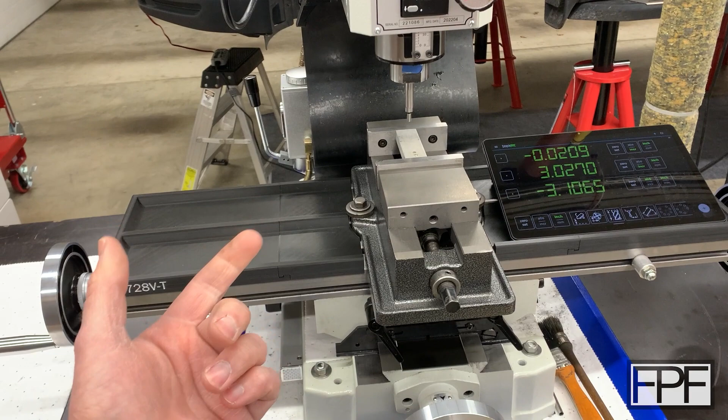So we're over here at the milling machine today, and for those of you that are subscribers to the channel, you might remember when we made these covers for the table on the milling machine. There's two pieces on each side. They interlock together and they cover our precision ground table so that we don't damage it in case we drop something, and also just keeps the chips from getting all over it. It's a lot easier to vacuum this out, and it's got kind of like a tool tray set up on it as well. So if you haven't seen that and you're interested, you can check it out in my videos.

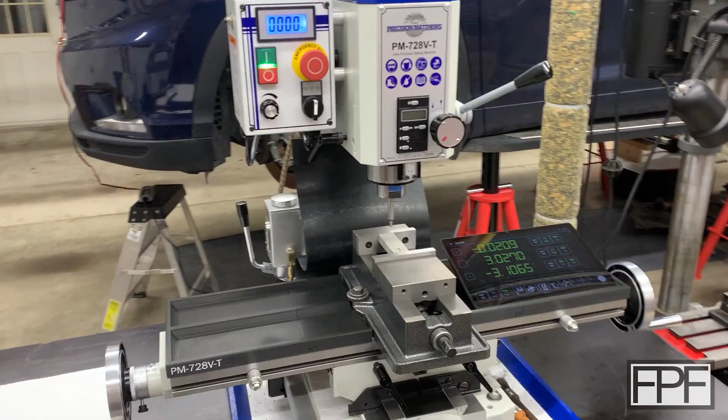But today what I want to talk about is installing a DRO on this mill. Now, they do sell this mill with a DRO. When I bought it, I had the option to buy it. I chose not to buy it initially because I kind of just wanted to get used to the machine first and get a feel for everything. And I thought, maybe I don't need it, right?

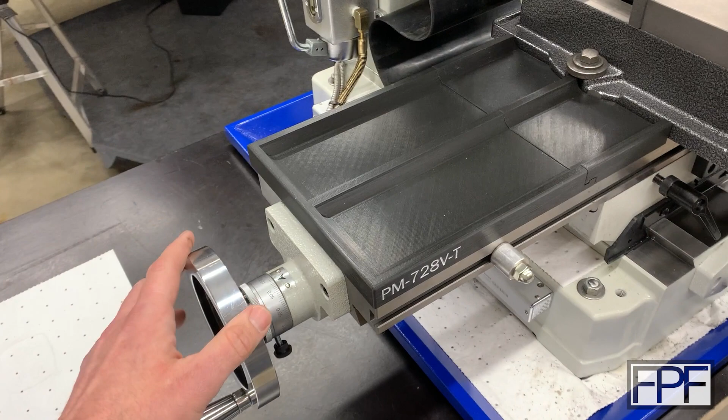I've run a lathe without a DRO. I never had any issues, but on a milling machine, it really is kind of a pain because your backlash is really difficult to work around in 3 dimensions. So what I mean by backlash is I can turn this handle a good bit in each direction before the table moves. A milling machine has 3 different axes, just the same as a 3D printer. You have your Z-axis up and down, you have your X-axis left and right here in the frame, and you have your Y-axis, which moves in and out, and that's all in relationship to the spindle.

The Z-axis, you're actually moving the spindle itself rather than moving the table on a bench mill like this. On a knee mill, the spindle stays stationary and the whole table actually goes up and down. And I can move this with these hand wheels on either side. But you see this distance here, and I know you can't feel that, but I'm moving the handle this distance and it's not actually moving the table. So that makes it a real pain to get up on a specific measurement, because if you overshoot by even a little bit, you got to come back, take the backlash out of it again, and then come back and try and hit your measurement and lock your table before you mill or drill.

So I realized I wanted to do a DRO on this. Now, they also sell the DRO kit for this mill separately. I can buy the whole kit, the scales that read the position of each of the axes, and the DRO head that gives you the numerical readout for this. I opted not to do that as well, mainly because I wanted to check out this TouchDRO system.

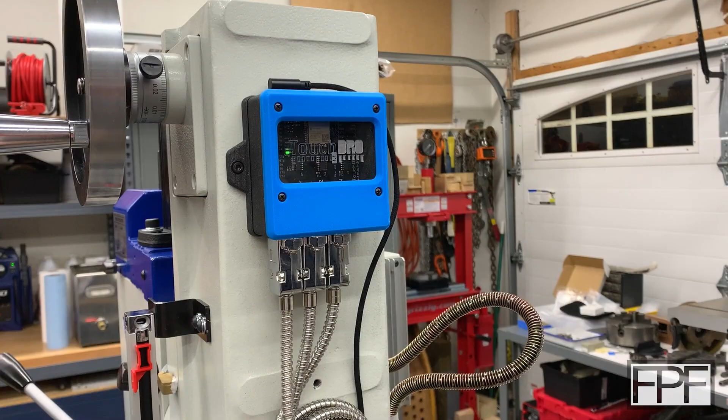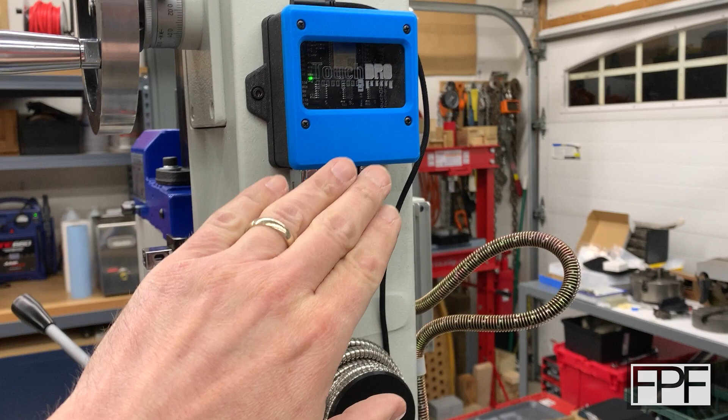All right, what is TouchDRO? So I'm going to try not to go on too many tangents in this video, but it's tough because we're talking about a lot of different things. So normally your scales, this is the X, Y, and Z cables from the scales on this mill, would plug into like a big head that has a graphical display on it that shows you your position of your X, Y, and Z axis. This has no display.

Instead, it's just a circuit board in there that is reading the value from the scales and then sending that out via Bluetooth. It actually does some intelligent processing in here and remembers the position of the scale. But then it sends out that information to Bluetooth, and an Android tablet connects via Bluetooth. It has to be an Android tablet. You can't use iOS. But thankfully, Android tablets are really cheap. This is a brand new Lenovo M10 something or other, and it was like $160. No comparison to what it cost to pick up an iPad.

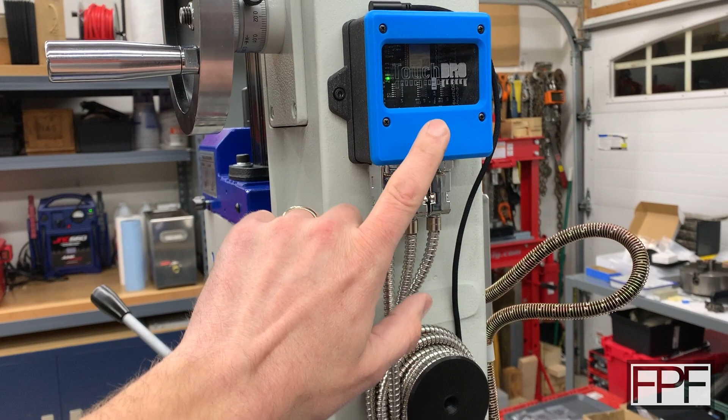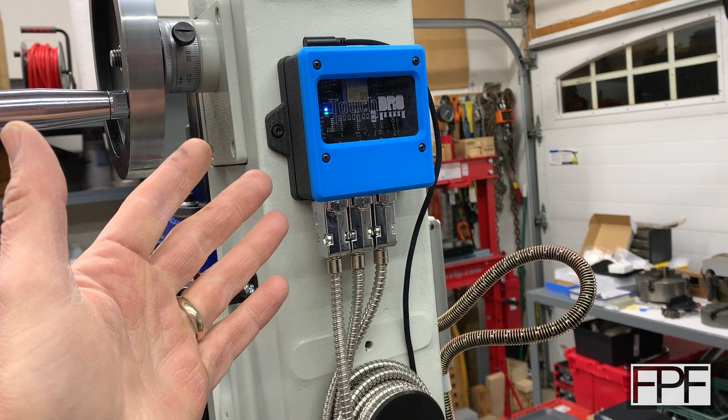So anyway, I wanted to do this because a normal DRO head has firmware or software that runs in it, and that's pretty much it. Whatever it does out of the box, that's it. So kind of imagine getting into 3D printing, buying a 3D printer, and only being able to do the things with it that were available at the time you bought it, right?

If other general features were added to slicers or whatever else, you couldn't take advantage of it on your printer. That would totally suck. And that is why I went this route on the mill for DRO, because not only can the software be upgraded on this guy, but it's just an app running on a tablet.

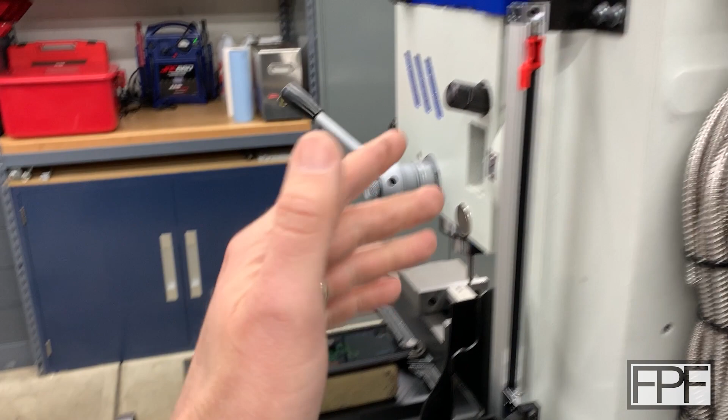The app gets updated all the time. They're always adding new features, cool stuff. No affiliation with these guys, but really, really happy with the experience.

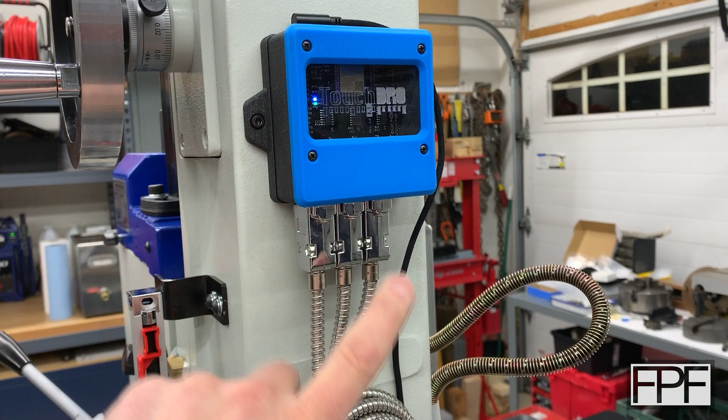This was purchased from a site called Yuriy's Toys, and I had to assemble it. The circuit board itself was pre-built. I didn't have to do any soldering, but I did have to assemble the case and assemble the pin headers for the DRO connectors, just because there is some variation in how those things ship.

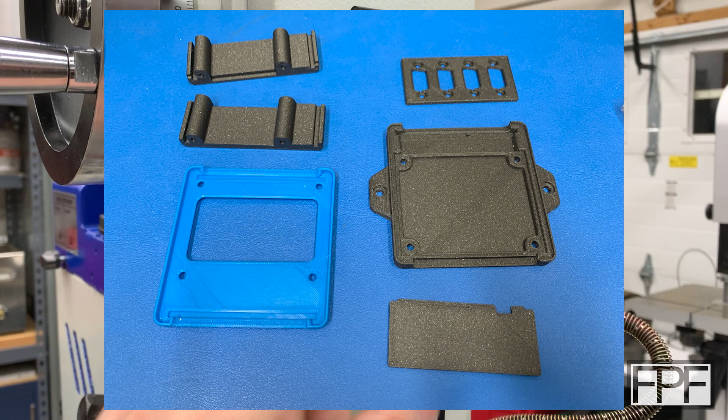Also want to point out, this case is 3D printed. I didn't print this, it came with the kit, and really, really impressive quality. It looks like he's using Galaxy Black. I don't know if he's using this stuff from Prusa or if it's a third party. It doesn't matter, it looks wonderful.

It's not printed at a 0.1 millimeter layer height, but the quality still looks really, really good. I think it's printed at 0.2. Really, really nice, clean prints.

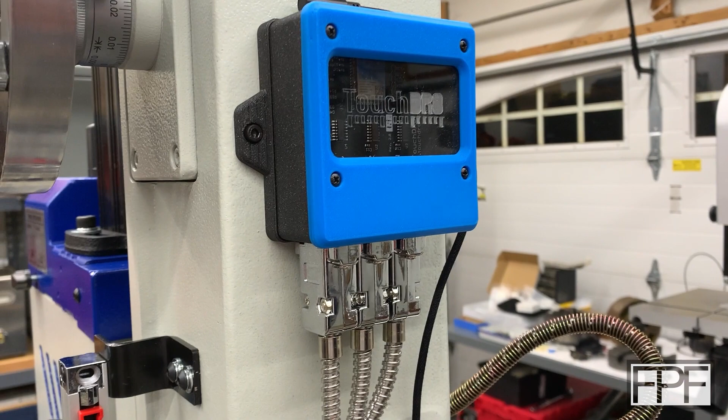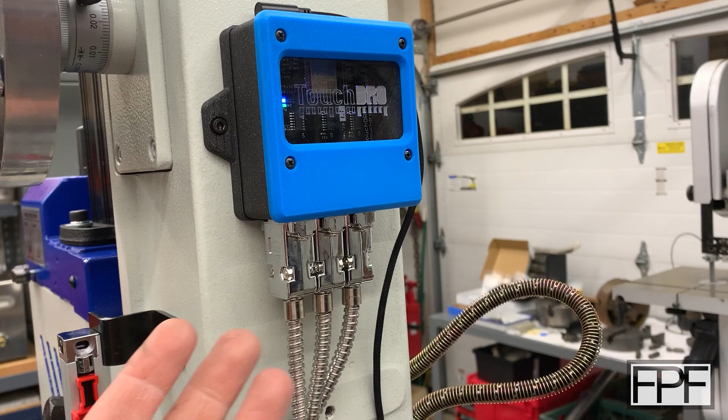So often I see 3D print kits ship out, and the quality of them is just abysmal. For anyone that gets them, I can see why they'd never get into 3D printing, because stuff is falling apart, it's cracking apart, the layers aren't all bonded. The quality of the 3D prints you get in this kit is exceptional. So great job, Yuriy's Toys.

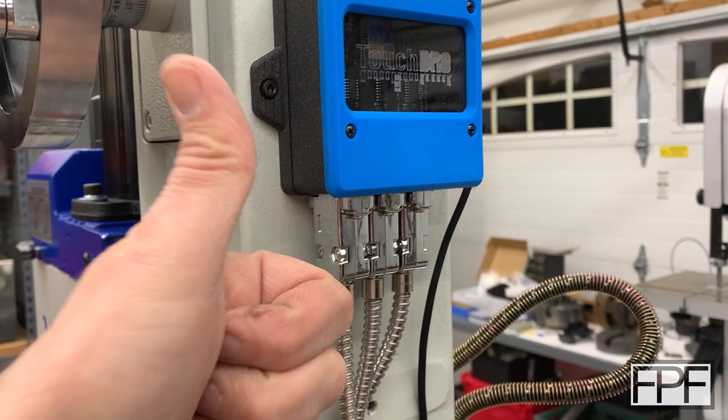And here's the interface for this. So we have the readout of our X, our Y, and our Z axis. And there's all sorts of other cool stuff we can do on here. For those that are not familiar with milling and why you'd want a DRO for this, I'll give you a quick demo.

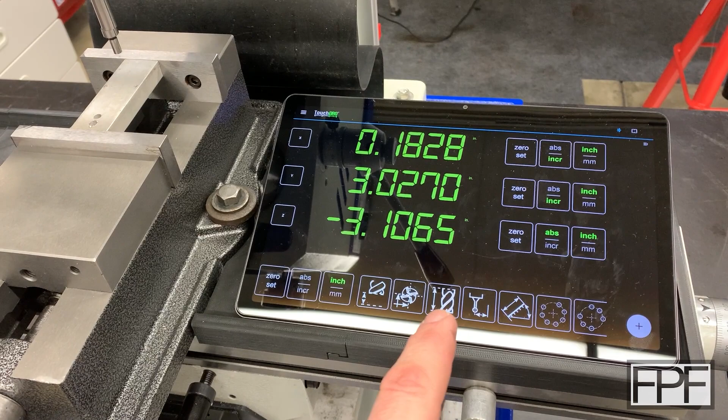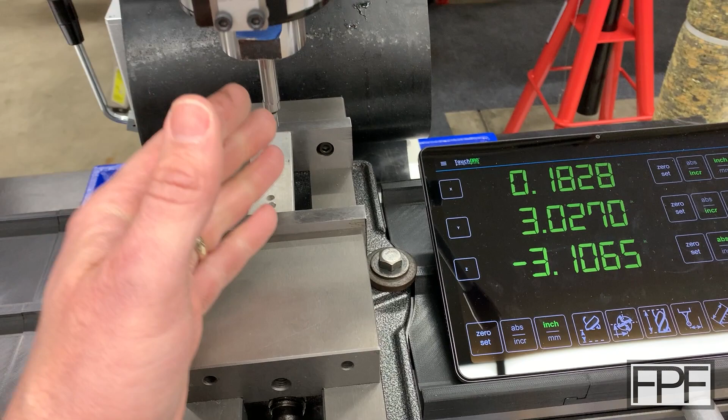Let's say that we want to drill a hole in this piece of stock and we want to drill it exactly in the middle. That wouldn't be terribly hard to do, right? We could blue this up with a blue marker or some layout fluid, measure the width of this with a digital caliper, and then scratch a line in the middle. But then how do we center up the spindle of the mill over top of that line?

Well, we could put a point in here and eyeball it. We'd probably get pretty close. But what if I told you this thing made it even easier?

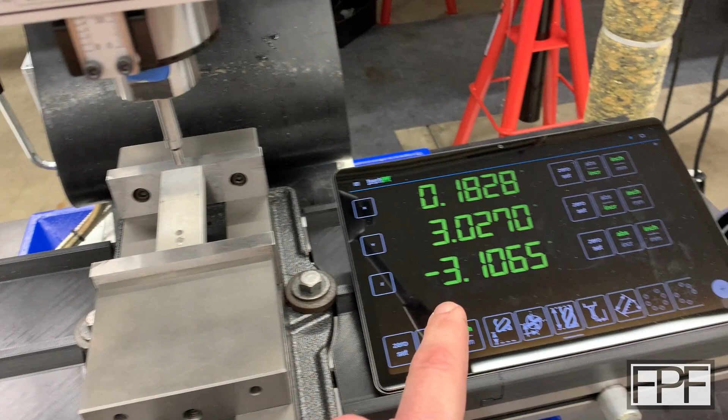All right, I got you in a tripod, hopefully everything is in frame. So what I have here on the spindle is an edge finder. This sort of wiggles around here and runs true to the top part of the shaft when it is up against a flat surface.

So what we're going to do is come in and find the edge of this side, and then we're going to go in and find the edge of this side, and then the DRO is just going to tell us where the center is.

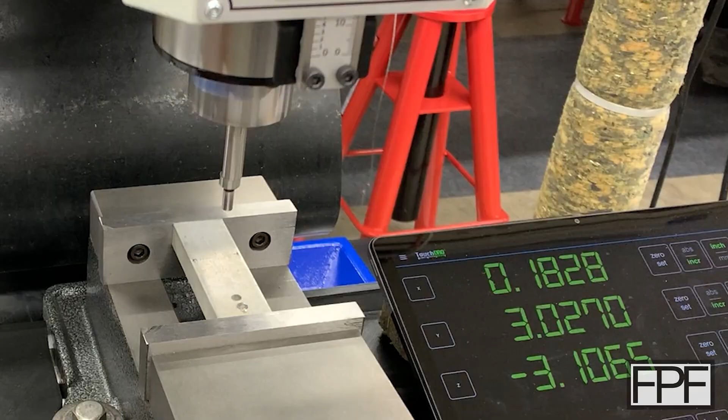Okay, so we've found both edges. Right away we can already say, all right, this piece of stock is exactly 1.2061 inches in width. And we can switch this guy to millimeters with just one click as well. But now where's the center, right? So I can click on this axis, tell it center, and now it divided that in half. Well, why is that useful?

Well, now all we've got to do is go up so we clear the stock. And now all I have to do is move X until we zero that out. Once we are at 0...

By the way, this is what I mean about that backlash. See, I went past it and I don't need to worry about trying to bring the handle back. I can just start turning in the other direction. I don't need to preload it. All right, that's close enough. So this digit here is 5/10, or 1/2 of a thousandth.

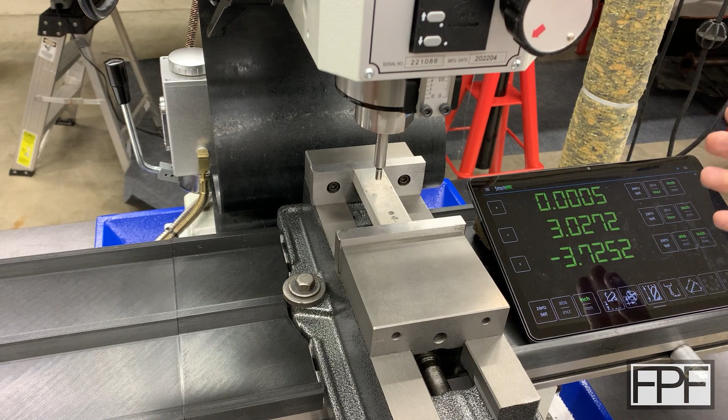Whatever we're going to bore this hole with isn't going to be that accurate anyway, so that's close enough, but you get the idea. We are right now in the very center of the stock. This is just a simple piece of material, so that wasn't terribly valuable, but you can see how this would be really useful in very complex objects that you're milling, particularly if you can't easily measure it with a caliper or something else.

What else can we do? Well, check this out. So let's say we wanted to actually bore 7 holes here to mount maybe a flange or something like that, but we wanted them all to be in a circle, a bolt circle. It's a small piece of stock, so let's say we wanted to do a really small one.

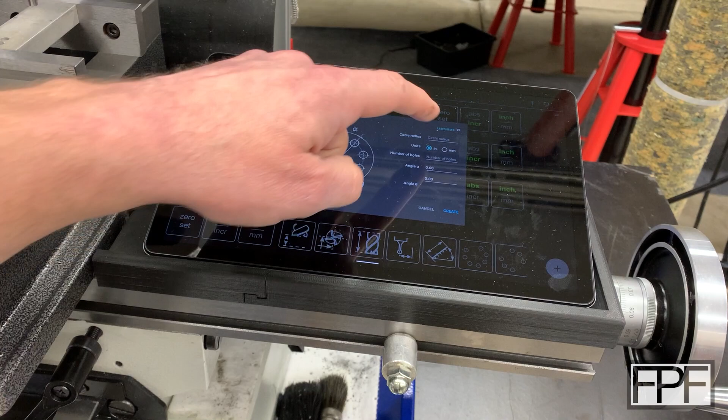Bring it down closer to the DRO. All right, hopefully you guys can see that with all the glare on it, my apologies. So we have a tool here called a bolt circle, and if I hit this, we can tell it the circle radius. It's a pretty small piece of stock, so our radius is going to be pretty small, maybe 0.3. And number of holes, let's make 7 holes.

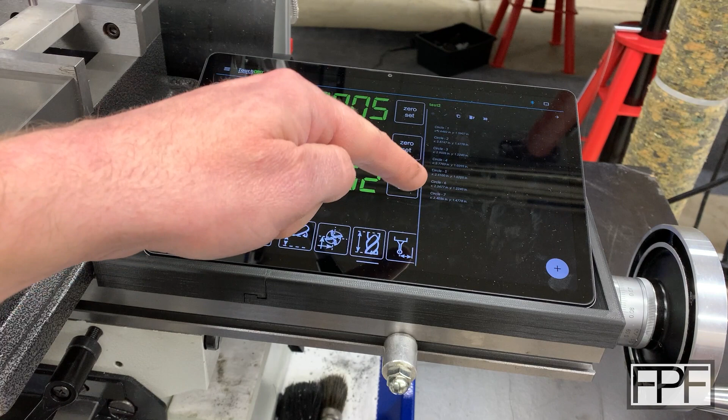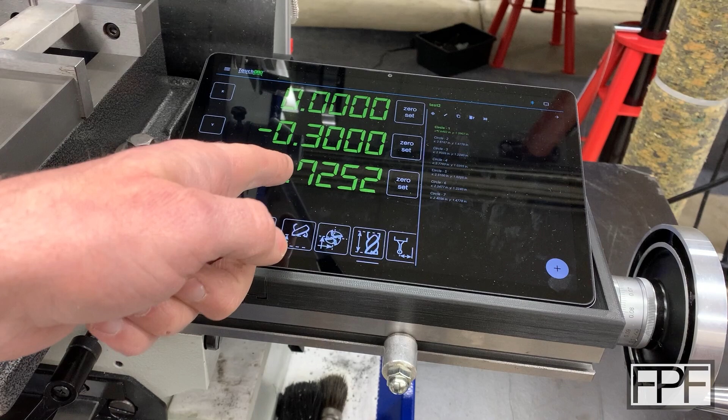And we hit create. Now if I expand our side here, we have a list of positions, and that is all of the positions that we need to actually drill the holes in. I can click on each one of these and it will adjust our readout here, and all I need to do is bring them all to 0 and we will be in the position of that first hole.

So if I crank this guy this direction—and Z we don't need to worry about, that's our vertical, at least in this type of operation. Now we would need to worry about it if we were trying to drill to a specific depth, but there we go, we're zeroed out. We could bore our first hole, and that's the first hole in that bolt circle. We can click the second one.

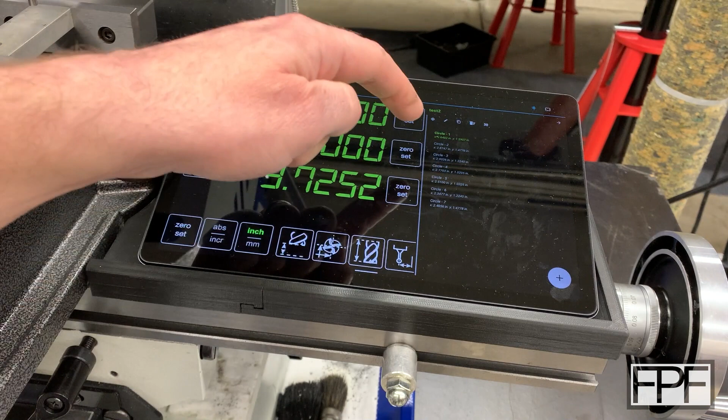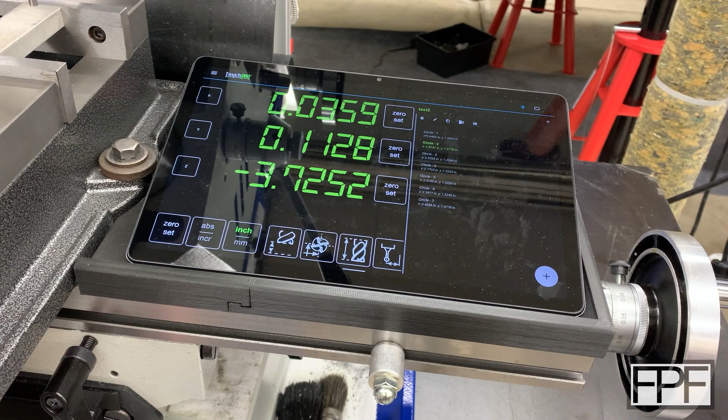Okay, well now we just bring these to 0 again. Unlock our axis. And there we go, we're pretty close. So that would be our second hole.

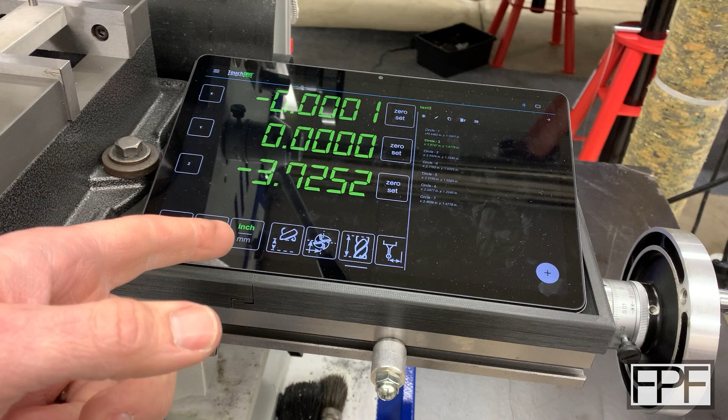But I know what you're saying, Rich: any DRO can do that. You're right, any DRO since probably like 1980 could do bolt circles, but you don't get a nice dialog box to fill in—you're pushing all sorts of buttons and trying to read abbreviations on the screen. But check this out.

There is a graphical representation of our workspace. I can zoom in on it. So there's our bolt circle. So first of all, we can visually see—yeah, that glare is terrible, let's see if I can just handhold you guys. All right, that's a little bit better. I don't know if you can see the difference here.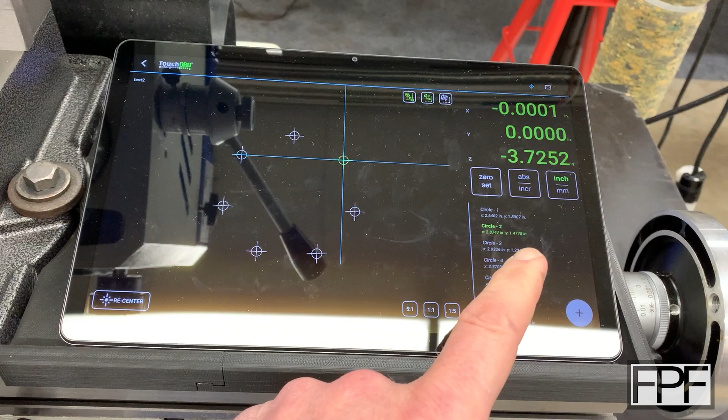So we can see our 7 holes for this bolt circle, and this one is green—that's because that's the hole that we're on. We don't even need to click in this view which hole we want to go to. If I want to go to, say, this hole down here, I can just start traveling towards it.

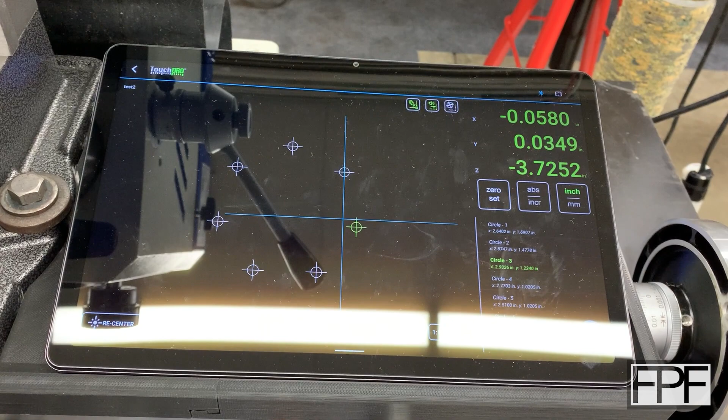You see my crosshair is moving, and as I get close to it, it automatically selects it. So now I can look at the crosshair to get pretty close, then look at the numbers up there at the upper right to fine tune it. And there we go, that's pretty close. So let's say I wanted to skip over to this one for some reason. Notice I didn't need to move the y-axis because these guys are in the same position on the y-axis, just the x changes.

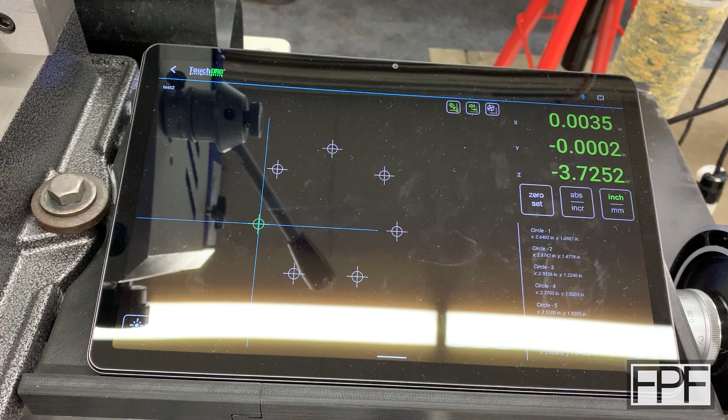And there we go, it's pretty close. All right, enough about the TouchDRO software, it's a 3D printing channel. What are we doing here?

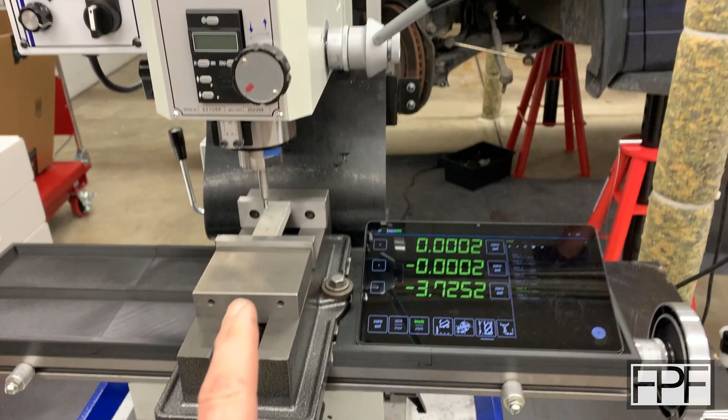As I mentioned, you could buy this milling machine with the DRO kit pre-installed, shipped to you ready to go. They also sell the DRO kit separately, so I could have bought their kit, bolted it up, and used their display. I chose not to do that because I wanted to do TouchDRO.

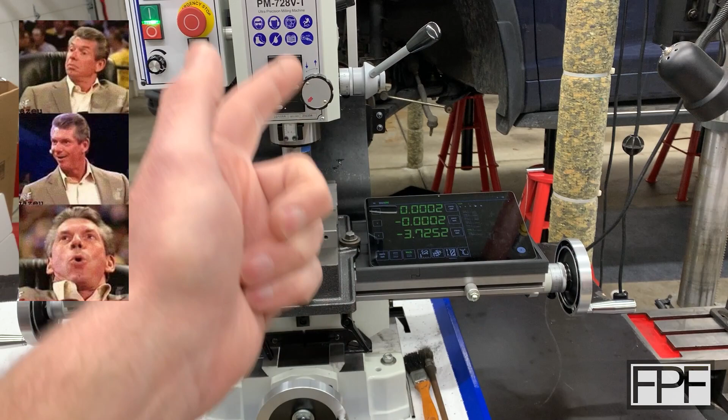I could have still bought their kit, used all the scales that bolt right up, and just thrown out the DRO head or sold it on eBay. Then picked up TouchDRO, connected the scales to that, and picked up a tablet. I didn't want to do that either, mainly because of cost. Their DRO systems, I think, start at $800 and go up to like $1,200. I wanted to be way below that for everything.

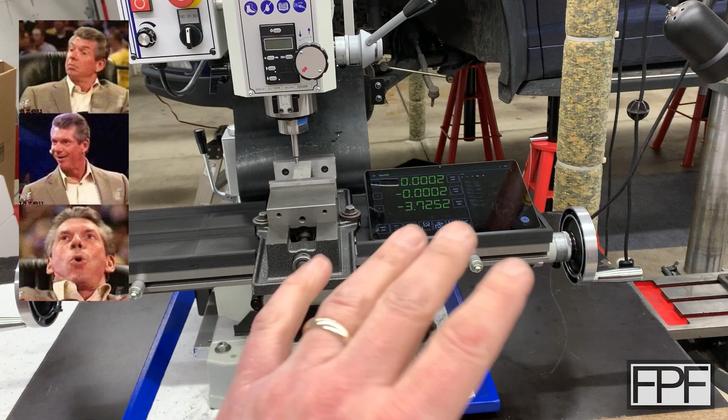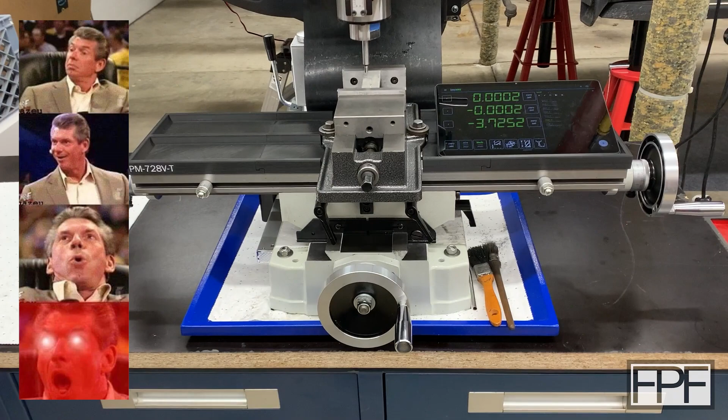So I chose option C, option D - I think we're at option D, where I was going to buy everything separately and just figure it out as I went. That means I needed scales for each one of the axes. This is the one for the Y-axis here. This measures the position of this.

There's a long part here that on this axis mounts to the casting, and then there's a head down there that moves back and forth and reads the position of the axis. Each one of these has 3D printed parts on it that make it fit on this machine.

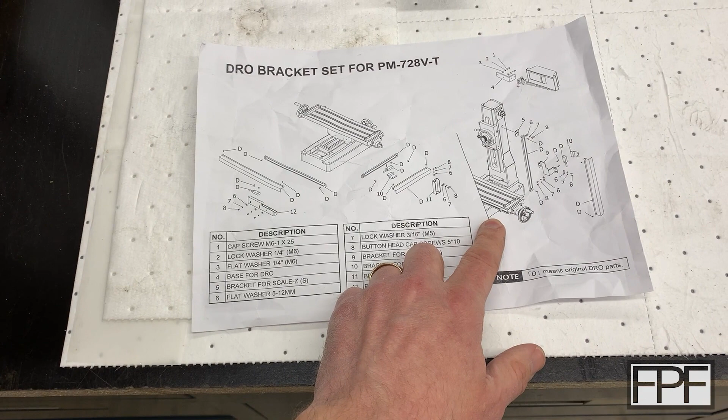I did choose to buy the bracket kit from Precision Matthews. I figured it'd be nice to have at least a starting point, and that is all these pieces here. For some of the axes, it actually made it pretty easy.

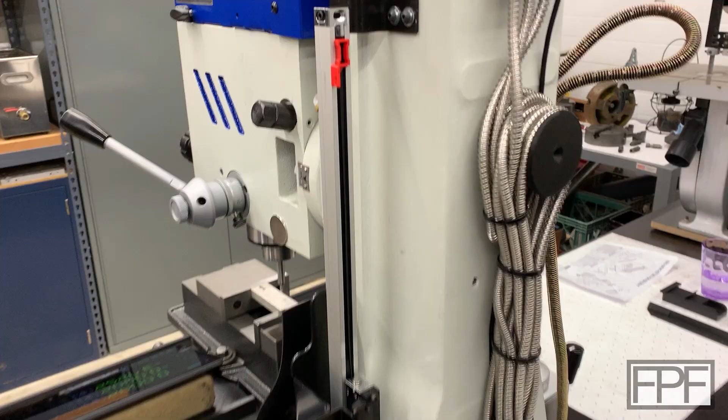So I started with Z. That looked like it was probably going to be the easiest - that's our axis over here. If we walk around the machine, here we are looking at the Z axis, and you can see this actually would have been pretty tough without the bracket kit.

Because this machine gets wider at the bottom for rigidity, there's a steel bracket up here at the top that spaces our scale away from the machine. At the bottom, it does just mount right to the casting. There are some shims in here to keep it from twisting - it did have a little bit of a twist the way it was first mounted. Then there's another bracket that attaches to the head of this machine.

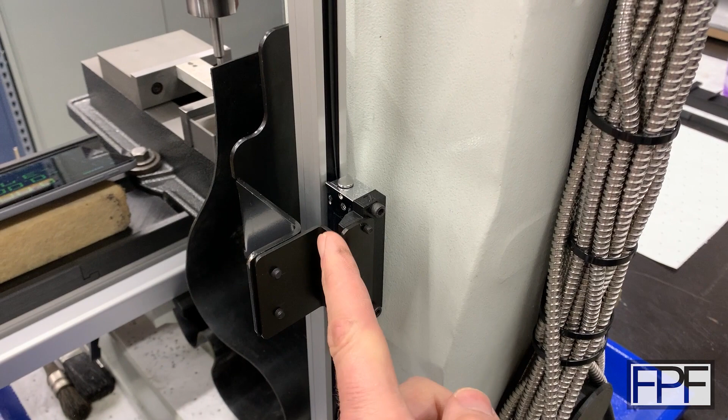This is the part that goes up and down, and that comes over and holds our head so that the head itself moves up and down when we crank the handle up here, so that this head here is moving up and down in this slot. This axis did turn out to be the easiest.

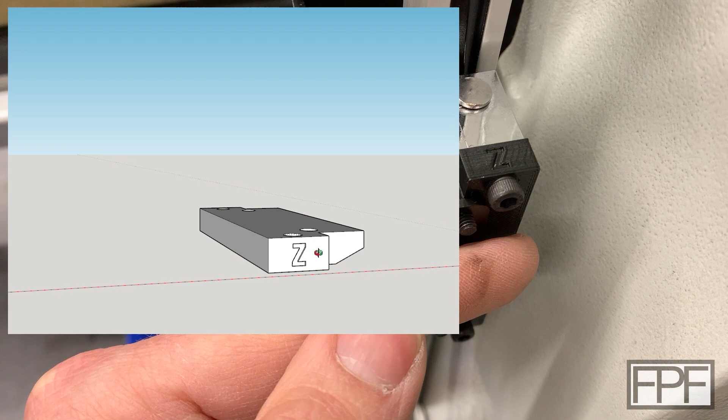Here's our 3D printed part right here. I was able to flip this piece, the orientation of this mounting bracket. Once I flipped it, all I needed to do was create this piece here that essentially shifts us over so that we can get to the back of this read head. These read heads aren't actually designed to be mounted from the back, but they do have a set of threaded holes back there - I don't see any reason why you can't mount it from back there.

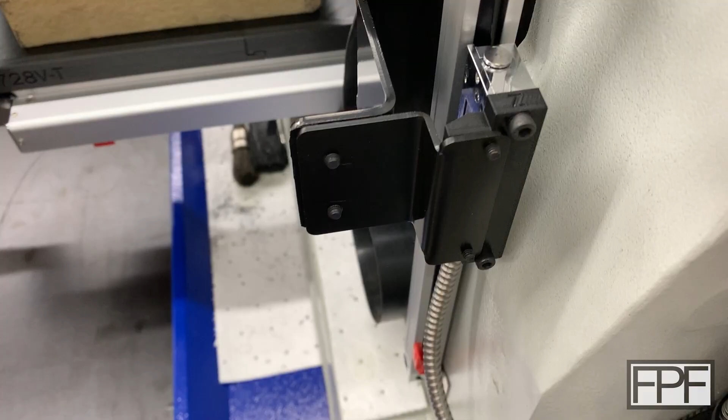So I did opt to do that, and this basically just offsets that. You can see I marked it as Z. Next one I did is the X-axis, and that is our long axis here.

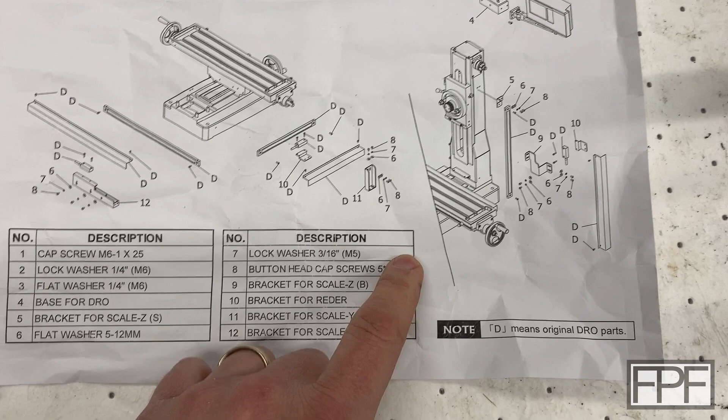That one is super tough to see - let me see if I can find a position where you can see it. Actually, it might just be easier to show you the bracket that they give you for that part. So that is, let's see, where is it? That's this guy here.

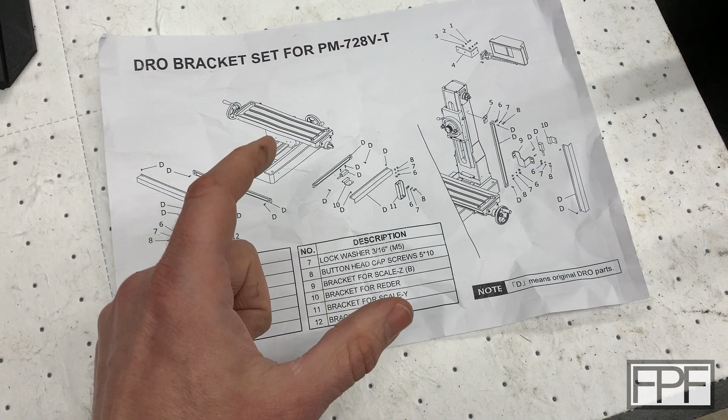Hard to get a sense of scale, but this piece of rubber back here keeps chips off of our ways for the Y-axis. It's just mounted up against the back of the casting for the saddle, with a piece of steel, just a thin steel plate. To mount the bracket for this, we remove that thin steel plate and instead replace it with this bracket here, and this guy's actually pretty big.

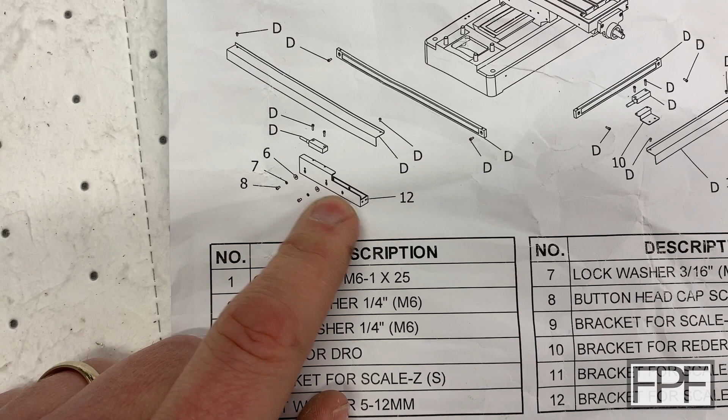Again, it's just kind of tough to sense scale here. What this does is it gives you a pocket in here where the head of the DRO is able to mount inside of, to read that scale as you're moving that axis back and forth.

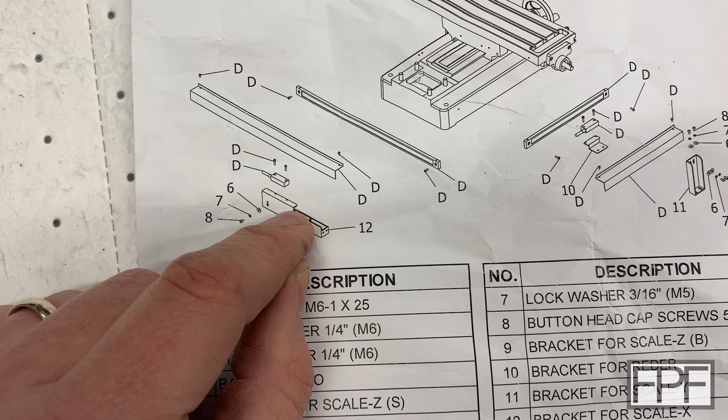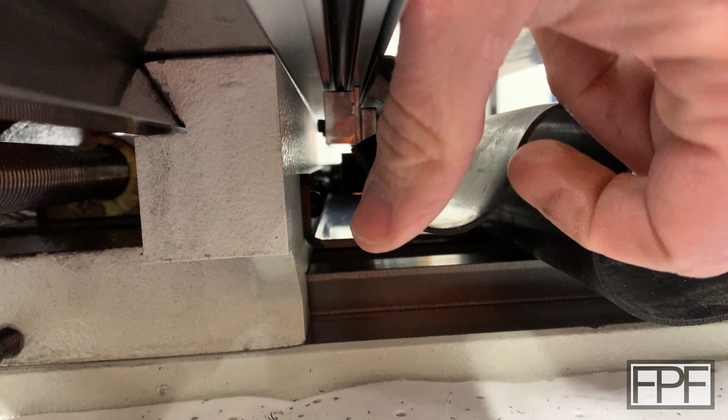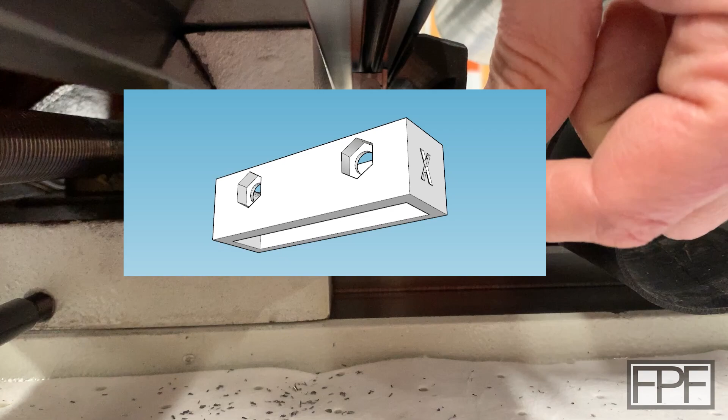All right, this one is just super hard to see because it's so far down in there, but there is a read head, this is the end of my finger, that's the read head itself, and this piece back here is the metal piece that they supply with the read head to mount it to the machine. And there's a 3D printed piece that wraps all the way around the lower part of that bracket that actually retains two nuts and also spaces it exactly the distance away from the edge of the front face of this bracket.

So that it is directly underneath the scale when it's all stacked up. And then it is retained by bolts that go all the way through. So they go through here, this piece here, which is also 3D printed, I'll get to this. They go through the rubber cover here, through the front of the 3D print, through that metal bracket, and then into the rear of the 3D print where the nut is retained. So not only does this sort of hold part of the hardware, but it also spaces it, positions the read head exactly where it needs to be so that it's perfectly aligned with the scale.

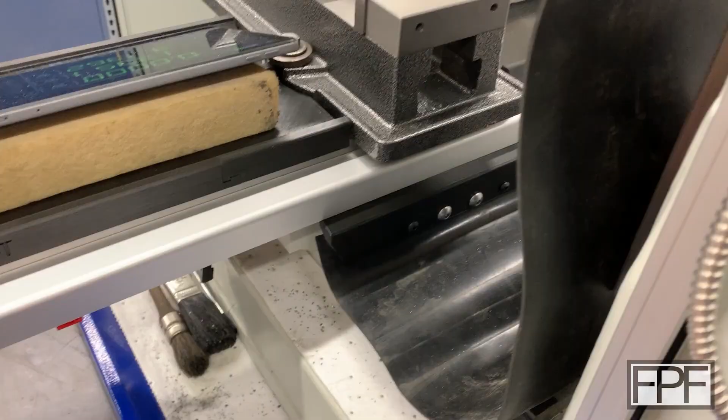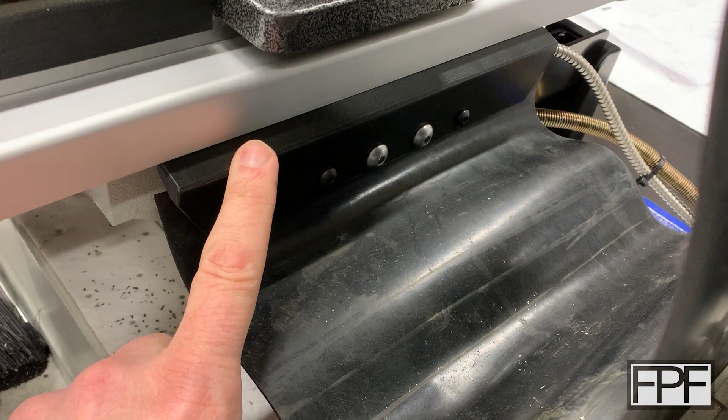All right, I moved our head up and I moved the y-axis out so we have just more room to see in here, so I can show you the second 3D print for the x-axis, and that is this chip guard here. Normally this rubber piece just attaches to the back of the saddle and you wouldn't have a scale or anything else here, so all the chips just fall into this and you're good to go. Once you install their bracket for the DRO, you've basically just got this steel trough back here that's open at the top, because this attaches to the other end of that trough.

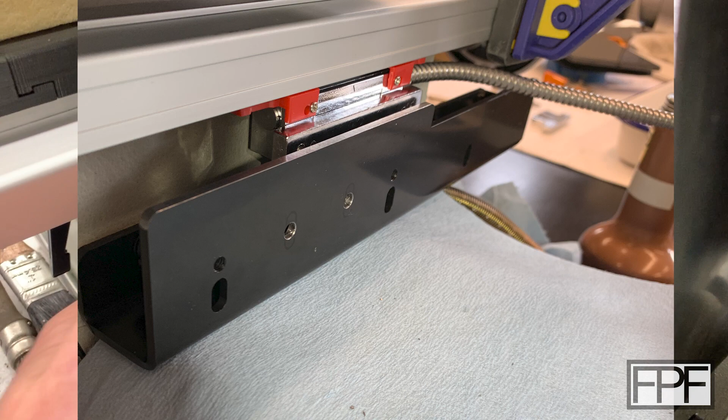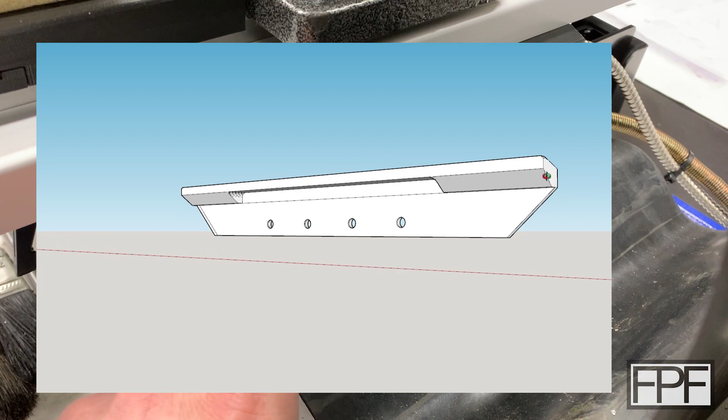So you've got an opening, at least the width of my thumb, for chips to fall down in there, which, you know, they're going to be a pain to clean out. But the bigger problem is that's where your read head is. And the chips and, you know, any cutting oil, anything like that is going to interfere with that over time. And it's going to be a real pain to clean out because there's just not a lot of room to work in there. So I designed this piece that replaces the thin piece of sheet metal that bolts this guy to that bracket that they give you.

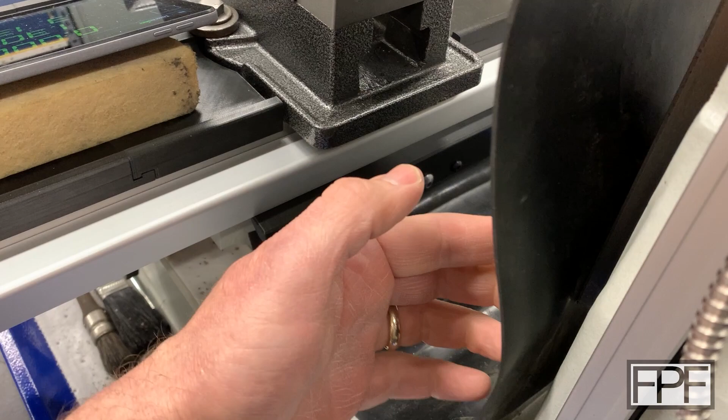And it also acts as a cover that comes all the way up here, and there's like a paper thin gap between the top of this guy and the bottom of the aluminum cover for the scale, so that as chips bounce around in here, whether they come down over the back or hit this and bounce back in this direction, they can't get into that area. They just fall back down into here.

In fact, if I come over to the other side, you can see the part of the trough here is still exposed. This has a solid bottom, so I can't stick my finger all the way through. And this side, I think I'm gonna add another 3D printed piece over here that just basically fills the trough on this side so that chips can't accumulate in there or get in there and then work their way in that direction. So that's one print still to do on this.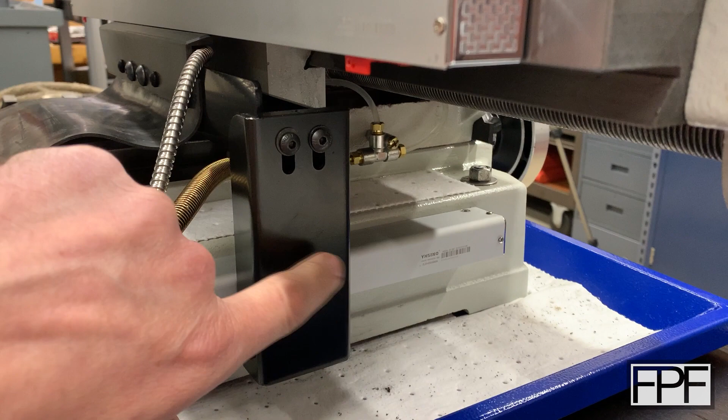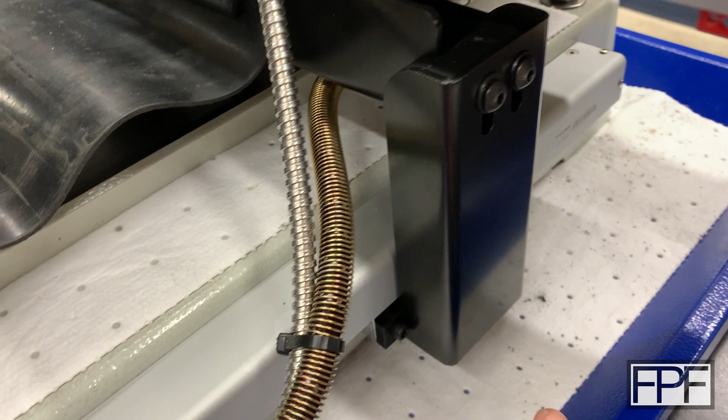So while we're over here, this is the read head for the y-axis. And it is at the bottom of this steel bracket. And this bracket was supplied with the kit that I bought from Precision Matthews, but it's mounted in reverse. The way that they have you use it, this is rotated 180 degrees from how I have it. So these curved surfaces are facing in this direction, which obviously means it's gonna sit further out in this direction. And then the read head mounts to the bottom of it in their configuration.

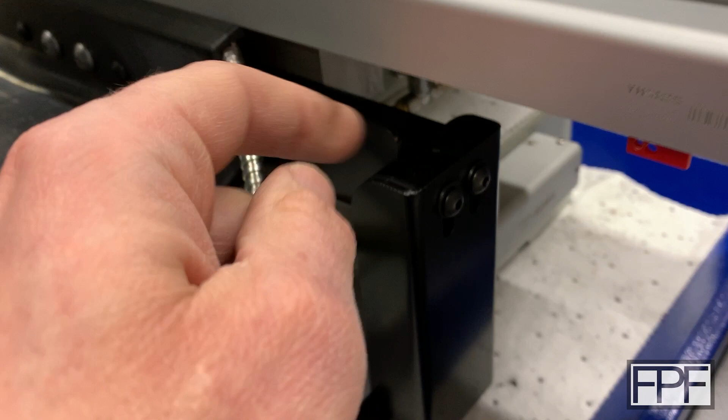What I did, again, since nothing's going to line up with the parts that I purchased, I flipped it around and I spaced it a little bit away from this with a 3D printed filler piece that also includes our mounts for that read head at the bottom. You can see the back of the bolt there.

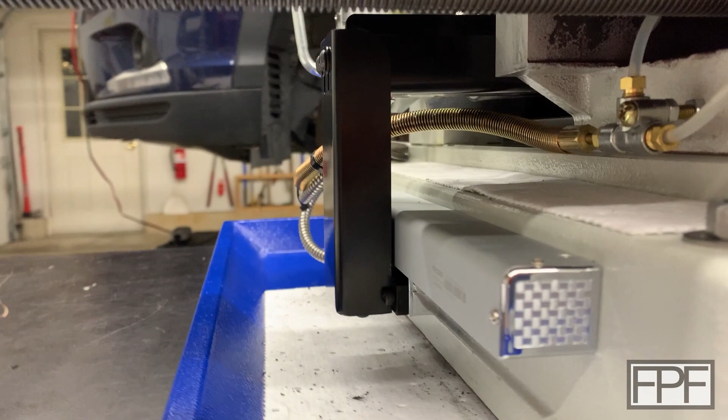And in fact, come back around the front — I actually have a piece I can show you here. So one concern I had with this setup is if chips bounce down here, they could potentially get in this little gap and then drop down where our read head mounts.

So I tried making a revised part that has a chip guard there. I got lazy and tried to do it as one piece since this prints standing up at 45 degrees, so I didn't need any supports. I didn't want to mess up this face down here since that's where our read head mounts to. I'm not happy with this because it still leaves too big of a gap due to that 45-degree slope.

So I think I'm going to do it as two pieces, where the guard just presses into some holes with dowel pins. But otherwise, this is what that piece looks like — it's basically filling the entirety of this steel piece. You can see at the top we have the integrated spacing away from this shaft, and at the bottom we have the mount for that read head. It just bolts through here.

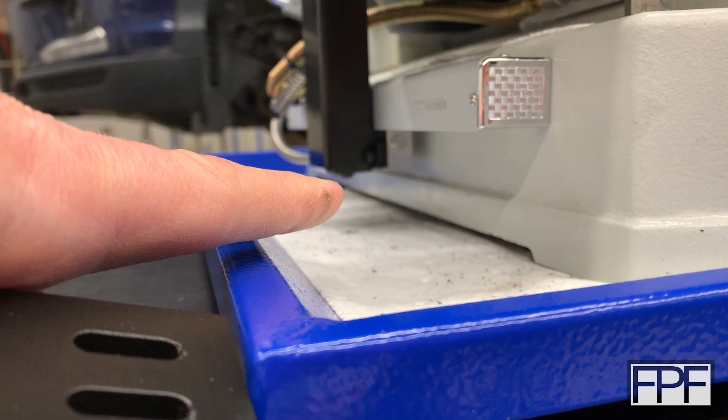Also, the original holes in the bottom of this steel piece — you can see the two screws in there — the 3D printed piece is also retained through the steel, through those holes as well, again just to add rigidity to the whole thing.

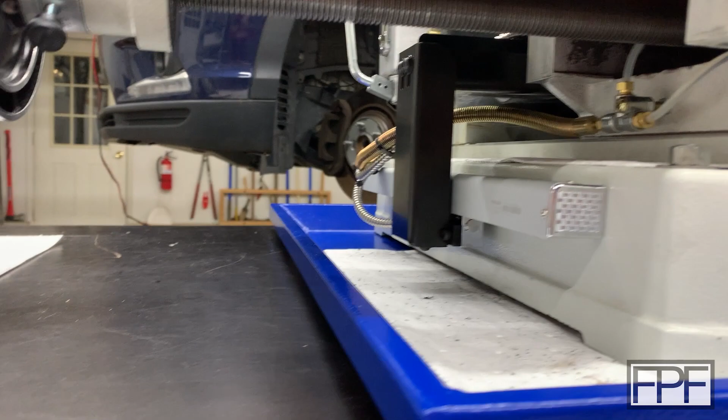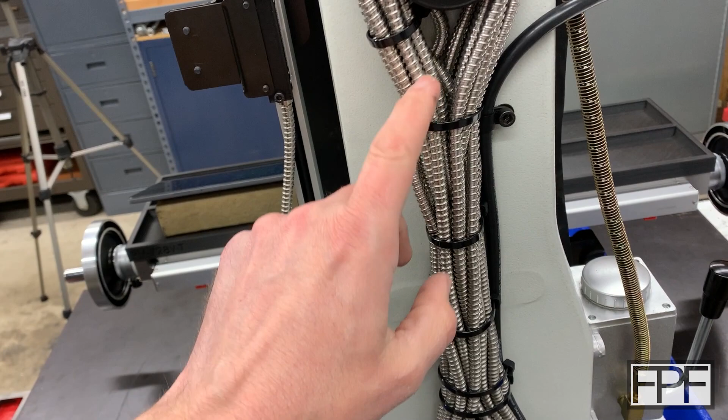So the last print on here is actually around the back. One of the challenges with installing a DRO on any machine is they give you all of this cable — it's stainless steel, not braided, I forget what they call this stuff, it's like a flexible material — but what do you do with all of it, right?

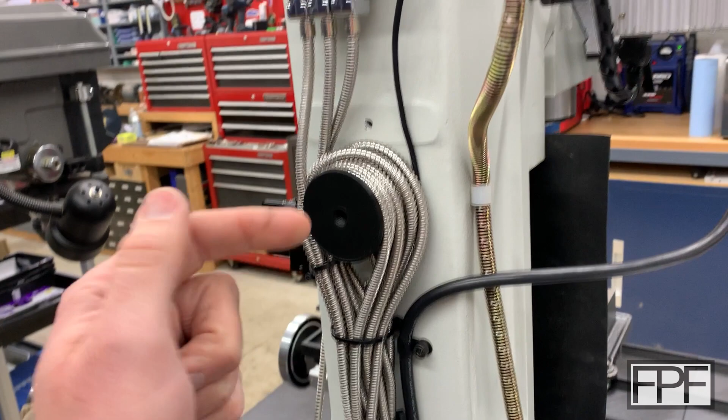So what I did was make two 3D printed plastic spools that have a recessed screw that just mounts into two holes in the casting. That gave me a base to start wrapping all the extra cord around, because the length isn't the same for each of these — they all need to terminate up here at the TouchDRO box, but they're all starting in different places. So each one has a different amount of wraps around this, and it's tucked all behind there, but the final run that goes up just drops down, makes a U shape, and is bundled up in the zip ties here.

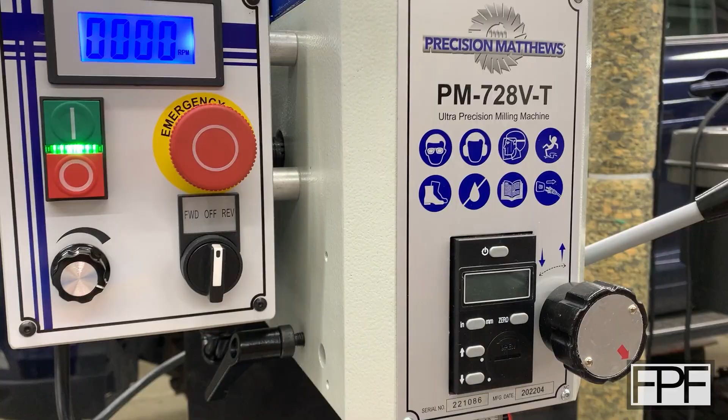So of course I'll be posting all the STLs for this for free. If you happen to have a PM-728V-T milling machine and you want to go TouchDRO, these are probably going to be of great value to you.

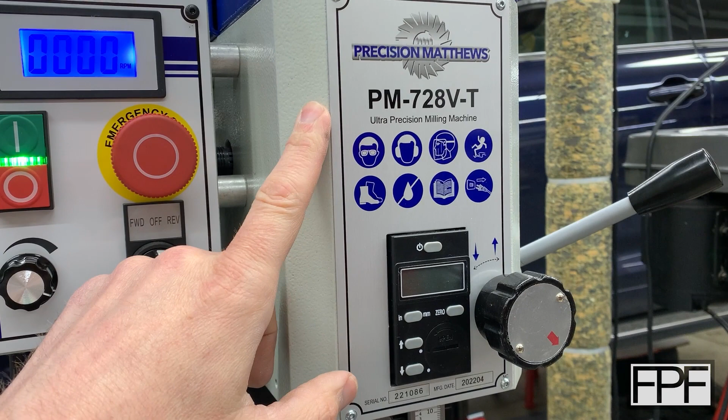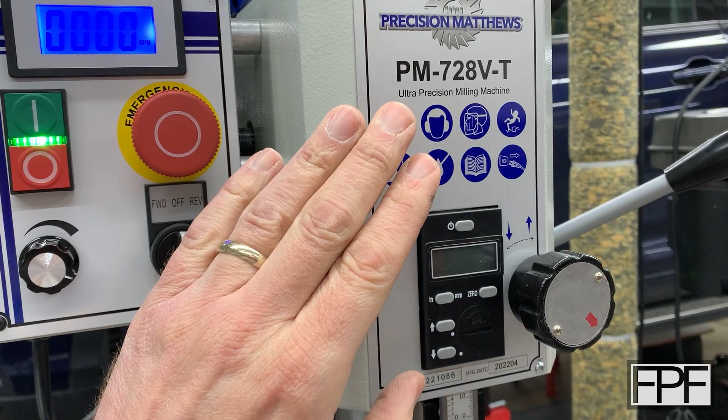If you're in the market for a benchtop milling machine, I am very happy with this machine so far. I don't have a ton of hours on it, but it's a Taiwanese import rather than a Chinese import. The Chinese stuff is really hit or miss, but the Taiwanese stuff is generally pretty good, and I'm very happy with this machine so far.